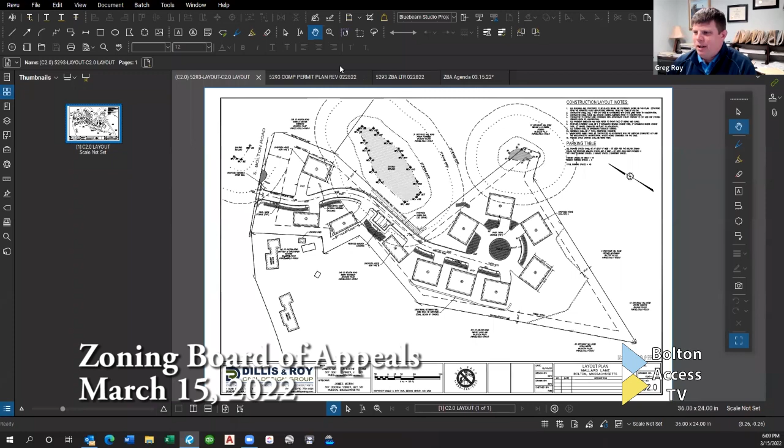After the last meeting, Jim and myself and our team regrouped a little bit, in light of the comments we had been receiving both at the last meeting and prior, and some of the issues that started to poke their head at us. Jim made the decision to reduce the density from 11 units down to 8 units.

That does a couple things for us, but I'll go over those in a second. Just an overview of where we're at with the plan: it's in a lot of ways very similar. We still have a cul-de-sac, a roadway coming up through the middle of the site, located in the same location as before. But you can see we've reduced the number of units.

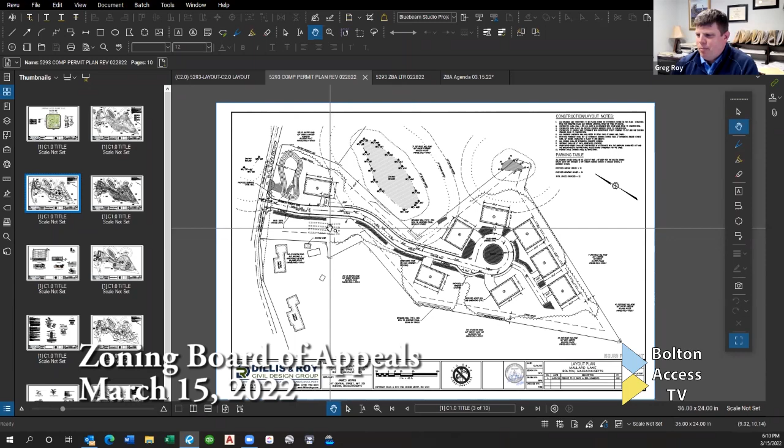The previous plan had units along this abutting property, and also one unit right in this location. This plan revision allowed us to move those units to the back of the site, which gets them further away from our closest abutter, which we see as a benefit.

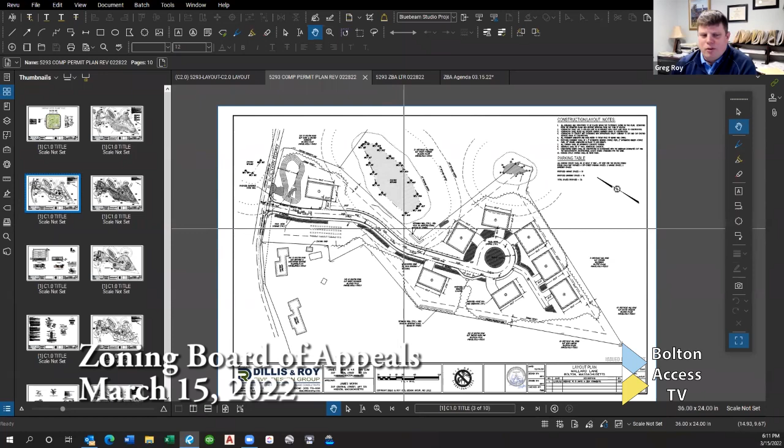It also allowed us to, because we now don't need to accommodate building footprint space particularly through the middle of the site, move the road further away from this wetland area. So it allowed us to be responsive to the concerns we were receiving relative to the wetlands impacts and buffer zone impacts that we had proposed.

It also allowed us to move the Unit 1 building completely outside of the buffer zone. So it just softened the blow a little bit relative to wetlands permitting impacts in particular, and reduces the magnitude of the waivers we need to request from your board relative to the town's local wetland protection bylaw.

Other things we did: one comment we heard last meeting was to take a look at the wastewater system for the site. If you recall, we were proposing the wastewater system in the back of the site, which is uphill, with septic tanks and pump chambers, and a pump chamber located down here that was going to pump back up to the leaching system.

One of the effects of relocating units to the back of the site is that it freed up some space in this location for the leaching field, so now we have a much simpler system, both to construct and to operate. All 7 of these units would be gravity fed to this leaching field.

This unit is still about one to two feet too low to get by gravity, so I still need to pump this building, but that won't pose any issues. We don't need any waivers of any kind to do that. But 7 of the units are now accessing the leaching field by gravity, which makes for a less complicated system, both to install and to operate in the future.

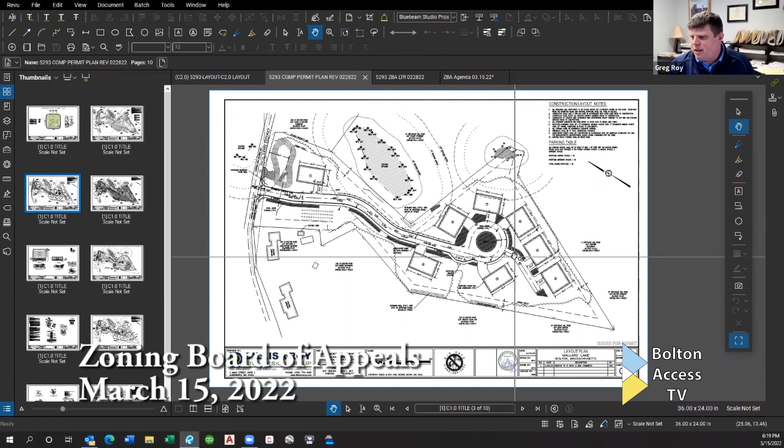One other thing I meant to mention earlier - you can kind of see, from a site layout standpoint, in order to get the units back here, we did introduce a shared driveway portion back here, which I think works out pretty nice. We explored moving the cul-de-sac a little bit to see if we could reshuffle things, but the location shown on the plan is really the best spot for it. So we have an offloaded configuration over here with these 2 units.

So we still have some grading behind those units, but the walls are quite a bit smaller than they were before. The wall went kind of all the way down that property line before. Over here, same thing - we have grading here, but the retaining wall really went most of the way along this wetland buffer edge. So we were able to really minimize that and reduce the size, both horizontally and vertically.

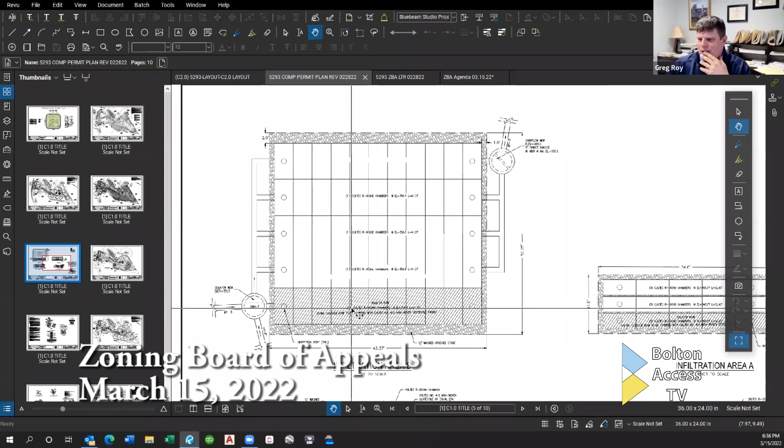So in cross section, if you were able to stand and look at the side, cut the system in half and look directly at it, this is what it would look like here. Are you all still seeing my screen? Yes. Thank you, okay. This is what it would look like.

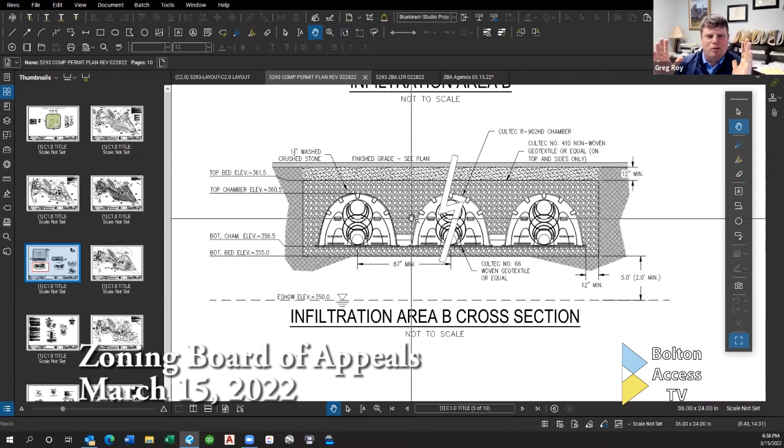They have these plastic chambers that are placed in rows next to each other in a crushed stone bed, and the entire crushed stone bed is wrapped with a filter fabric to keep the fine materials from sealing off the interface there for the exfiltration.

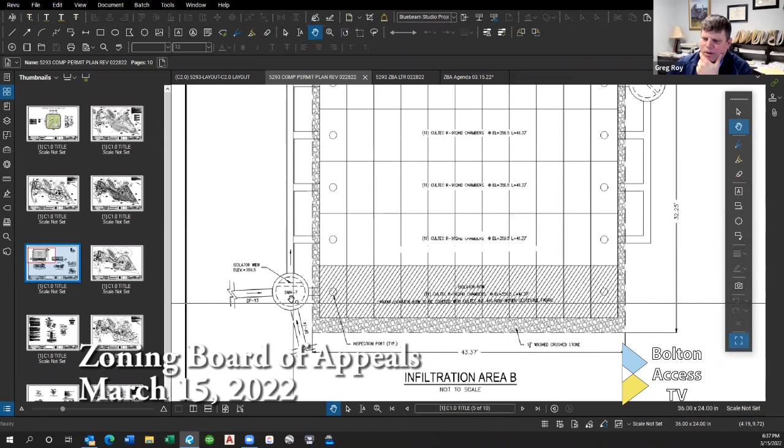So the way this works is the flow from the catch basins and the other inlets to the system flows into this entrance manhole. This manhole is a little bit exotic, I'll say—there's what's called a weir in here, kind of a dam that we build in that manhole that forces all of the initial flows, the first flush from the site, into this hatched row here, which is known as an isolator row.

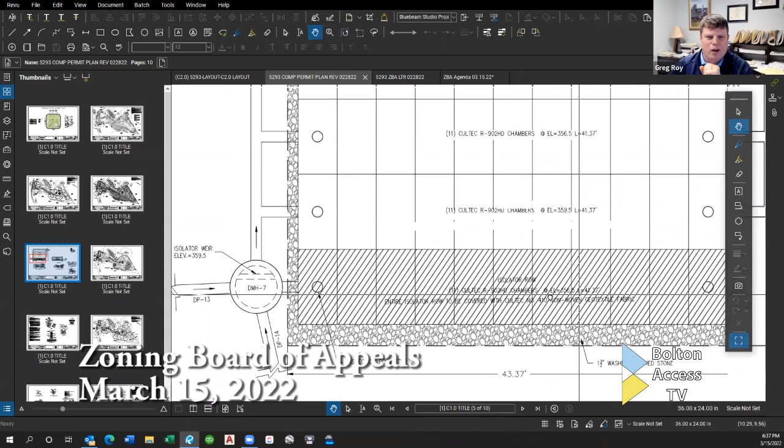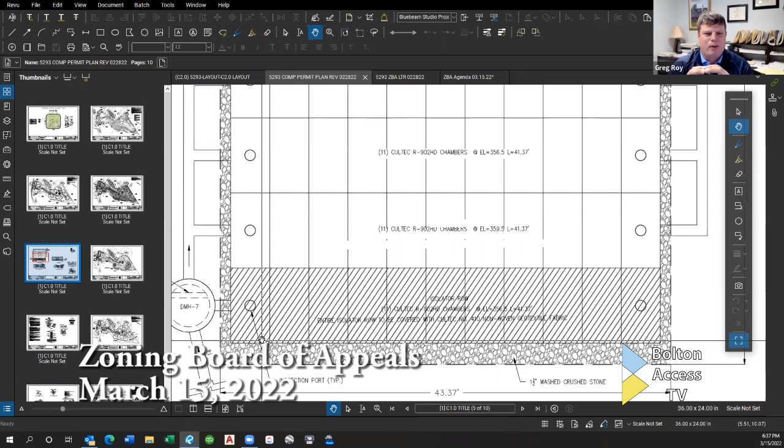That isolator row is isolated from the stone—we actually wrap the chamber with another layer of filter fabric. It receives that first flush, and the first flush of runoff in any storm event is where you're going to get the most sediment load and suspended solids entering the system. So what we're doing is capturing that, allowing it to settle in that isolator row.

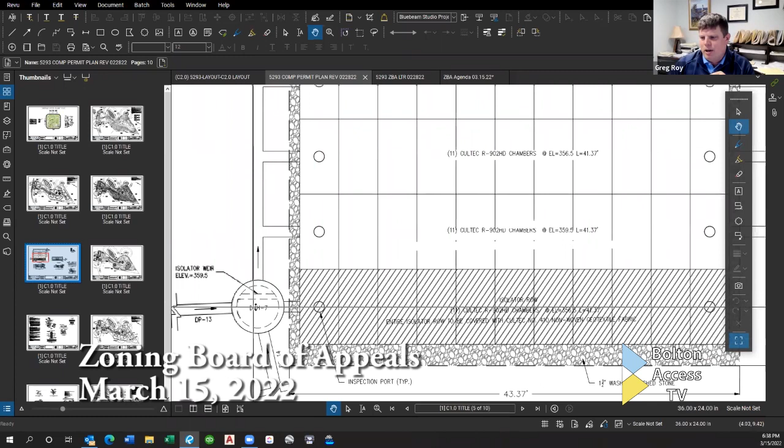And then as the storm continues and we get more flow, it fills up and flows over the dam in this manhole, fills up the rest of the structure, leaches down into the stone, and infiltrates into the soil below. That isolator row is accessible through this manhole, but also through these inspection ports, and can actually be jetted and vacuumed out.

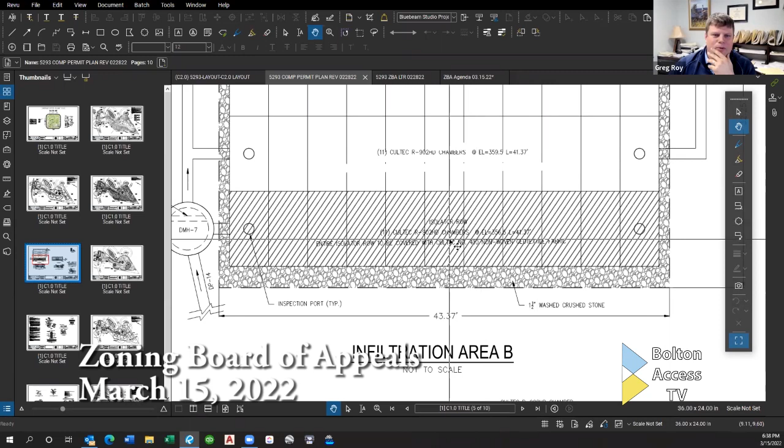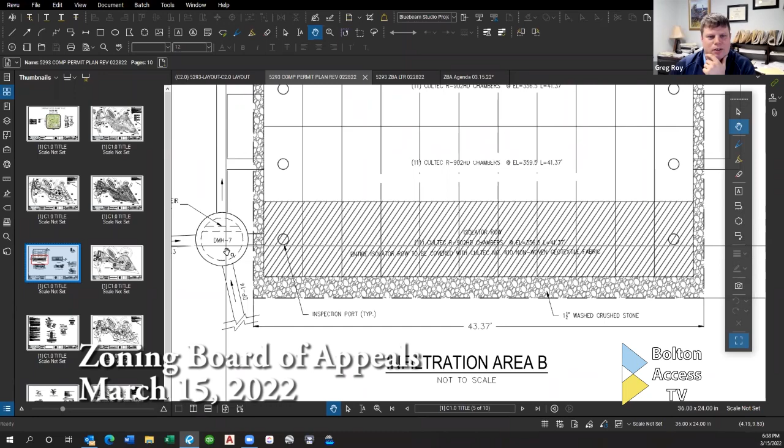That's part of the operation and maintenance of the system. You periodically need to inspect it routinely, like yearly, and when the sediment load gets to a certain point, that needs to be dealt with and jetted. You can put a jet in here, jet the row, and suck it out with a vacuum-style truck.

All of this is meant to protect and preserve the infiltrative capacity of the system. We're trapping the particles in the stormwater that, if left just to flow into the stone, would seal off that interface and over time diminish the capacity. So that's how that works.

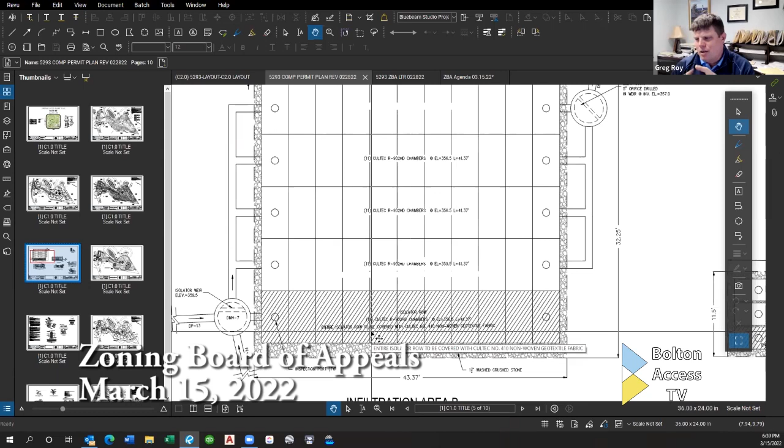Now on the outlet side, there's another weir, but it's really a dam, for lack of a better word, and this is what restricts the flow going out of the system. This dam is what keeps and forces the flow to pond and forces it to exfiltrate. There's a low flow—we drill a hole in that dam to let a small amount of water out, which restricts that release rate and lengthens the time by which it's released, to eliminate impacts downstream. High flows, anything over the 100-year storm event, will exit over the top of that dam for relief, and then bypass down to the outlet.

So all of that has been designed in accordance with the stormwater management policies to make sure that the post-developed runoff directed to that outlet, to that wetland, is less than or equal to, in our case less than, in all storms, to the runoff that's going there currently today.

So we did a comparison of the pre-developed watershed runoff patterns, and then we compared what it would be with this system. We did a comparative table in our drainage report that shows that with the implementation and construction of this system, all of those flows will actually be reduced.

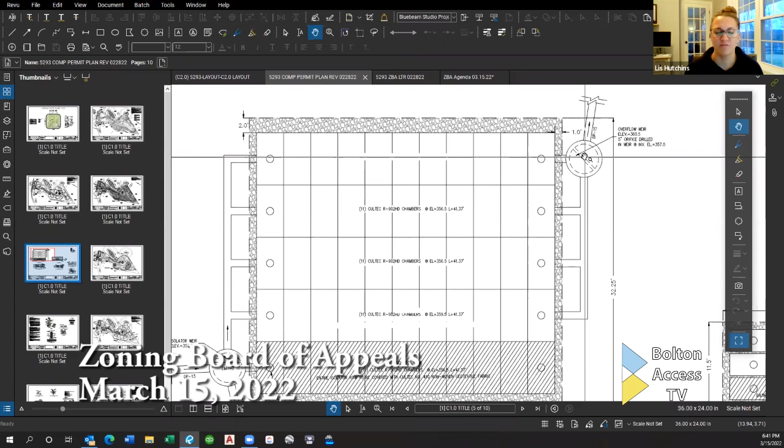After construction. And what is this basin capturing from? Yep, great question. We have two catch basins. I wish I could pull up another map, it'd be more clear. I have a watershed map, but it'd be too hard to get.

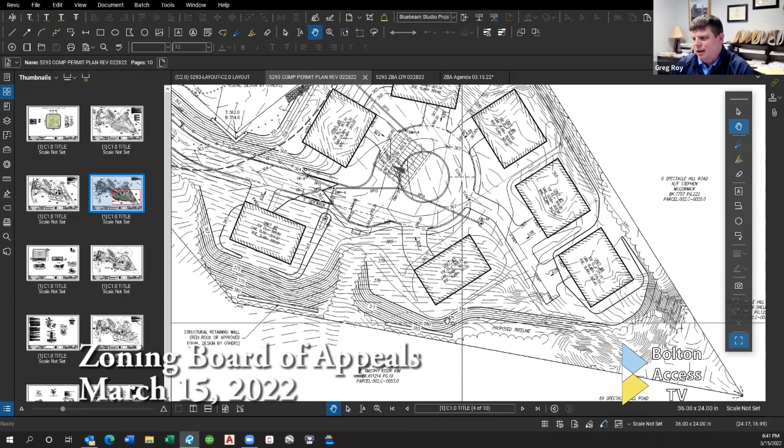So all the runoff from the cul-de-sac area flows down to these two catch basins and then actually goes back to this system. We also receive most of the roof runoff also flows into this system from the cul-de-sac area, and all of the area on the back here flows in. We've got some additional inlets that are going to pick up the overland flow and get that into the system as well.

So you can kind of see we have swales that come around here, another one that comes off of this shared driveway with another catch basin inlet here that also discharges the flow into that. So basically, with the exception of the back parts of some of these roofs, all of this roof, all of this roof, all of this roof all flow and get infiltrated into that infiltration basin.

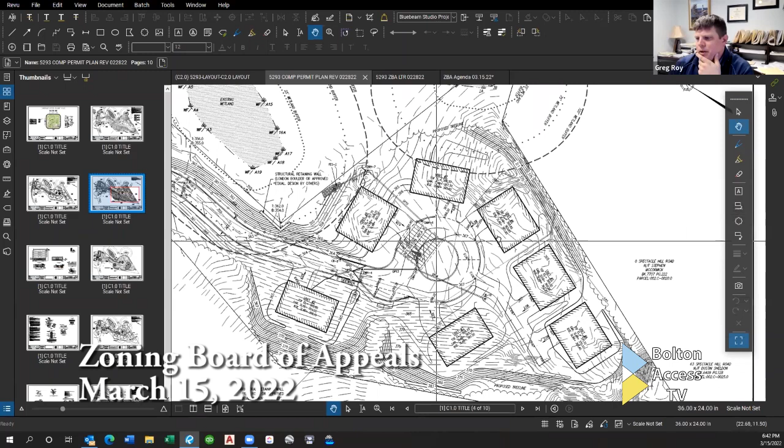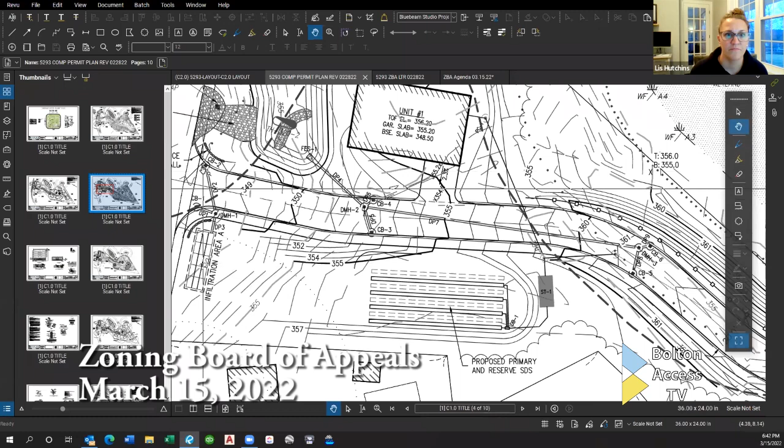And then the other one down here receives flows from these two catch basins down. So all the flows from the rest of the site go into this basin, with the exception of a very small amount of water downhill of these two basins. We put a very small infiltration system here just to catch and make sure we're not discharging water onto South Bolton Road pavement.

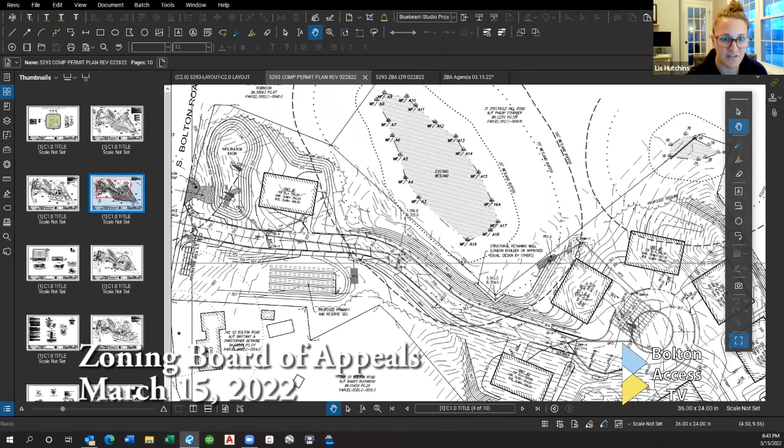Okay, so just to clarify, from that top, unit 2, basically where those other two catch basins are, between that and unit 1, that's actually going into the infiltration basin, not into infiltration area A. So infiltration area A is going to specifically, there's 2 catch basins there that will catch what would roll into the road. Yeah, it's basically just a little bit more, but basically just the road from this point down.

Okay, and then that infiltration basin there, what is the proposed function of that? Like, how is that basin supposed to work? That's going to be an open basin, so it'll look like an excavated pond, but it'll be dry. We intend it to be a dry basin.

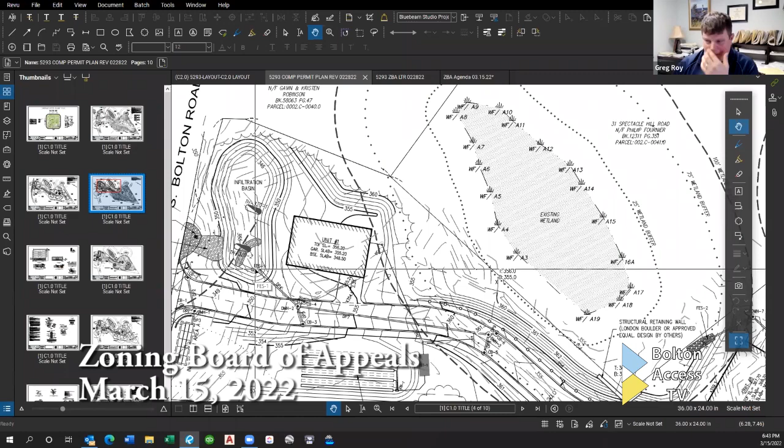It'll function similar to the isolator row I just explained. We'll have more of a conventional forebay, so we'll dam up a small portion just as we enter into the pond, and that is intended to hold up that water, take that first flush again, and settle out the sediment and suspended solids that we have.

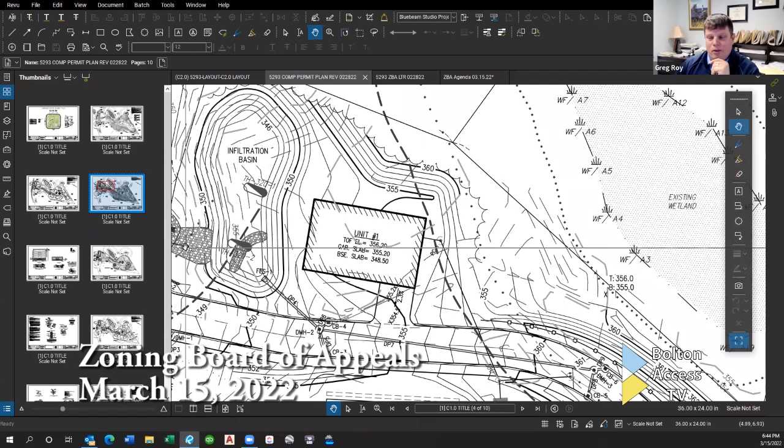As the storm continues, the water level would build up in the pond. But we've designed this one to completely infiltrate up to and including the 100-year storm event. So the soils here are very good and sandy, the groundwater table is very low, so we do not have an outlet release out of this basin up to and including the 100-year storm event.

But if we had an act of God, which we've had pretty much every summer for the last 3 to 4 years, at least one, if not 2 or 3, we have an emergency overflow weir here where it would spill down and enter into this catch basin where it discharges across the street. But that would only be an emergency, greater than 7-inch rain, tropical storm event basically is what we're looking at.

And just to be clear, we're comfortable with the overflow from that infiltration basin going into that catch basin based on its current functionality. The reason I'm asking is because I do drive by this area on periodic occasion, and I know it has helped somewhat the flooding seen on South Bolton Road. But in my opinion, I still don't think it's the best design ever, and there still tends to be a little bit of runoff there.

So I am a little bit nervous about that, and again, I know it's like an act of God situation. So if we're having a tropical storm, nobody should even be on the roads to begin with. So that's an issue.

But that being said, I just want to make sure we're comfortable with that type of flow. I suppose the DPW director will want to weigh in on that. But in pretty much most projects I work on, it's deemed acceptable if I can show through drainage calculations that I'm not discharging anything up to the 100-year storm event. In some towns it's less, sometimes they look at the 25-year or 50-year threshold, but in this case the 100-year is pretty much the largest storm we'd be reviewing. And again, I have zero discharge out of that, so I don't anticipate any issues.

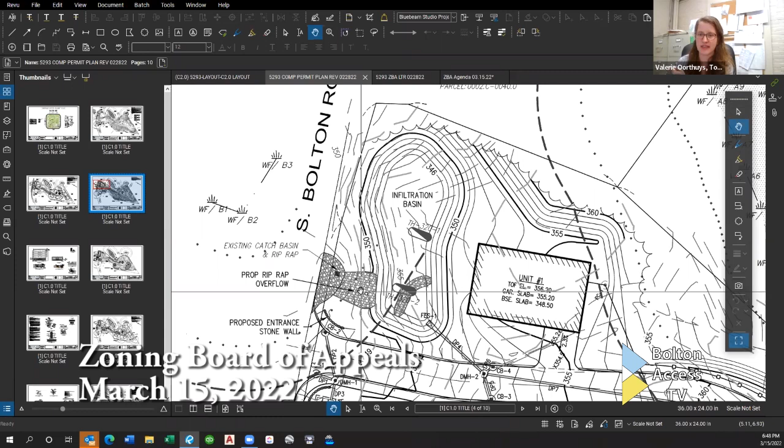Sure, all right. So one topic I still have concerns over is the wetlands in the area. There's still a portion of the roadway and a portion of Unit 7 within that 100-foot buffer. Since the 2019 wetland delineation, I believe there was a vernal pool that has been certified, and the Conservation Commission did not review or confirm the delineation of the wetlands by Unit 7, so that other pocket could have greater impacts on the site than is currently shown. An ANRAD or an NOI has not yet been filed with the Conservation Commission, and that's not a requirement of this permit. But since October we've been hearing from the applicant that this would happen during the ZBA's process, so I wanted to know if that's still intended to happen within the public hearing process or after, because that's really how the zoning board is going to get comment from the Conservation Commission. Otherwise we'll just need to insert conditions to cover our bases.

Yeah, I'll speak on that, that was my intent. But as we move forward and reduce the amount of units and pull everything out, for me to go to conservation I've got to know that these units are in the right spot. So I'm probably going to say at this point that I really need a decision from the ZBA so I can move forward with the locations.

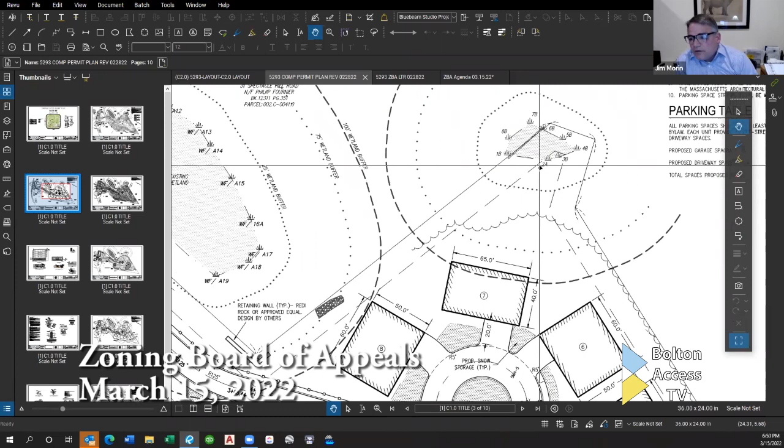So that's what I— go ahead. Yeah, if I could talk to that a little bit. So filing an ANRAD is one thing, and that hasn't been done yet, to your point, but that's certainly something that could be done. It's a little bit challenging in this case because the wetlands, with the exception of the one you were just referring to, Valerie, in the back of Unit 7, the other one's off site, so it's a little hard to do. We just kind of ran into this issue in Groton — the Conservation Commission can't go on another adjacent property and certify a wetland line without permission from the property owner. So it's a little bit tricky here, and that's sort of the issue with the ANRAD.

The notice of intent, and I talked to this with Jim as I was getting involved here a few months back.

The notice of intent filing really in a 40B project needs to follow the comprehensive permit. The reason why is the authority to grant waivers from local wetland bylaws lies with this board. So it's putting the cart before the horse to go to the Conservation Commission and ask for an order of conditions when we don't even know what waivers we're going to receive. We need to have the zoning resolved with the waivers so we can file the correct filing with the Conservation Commission pursuant to the Wetlands Protection Act.

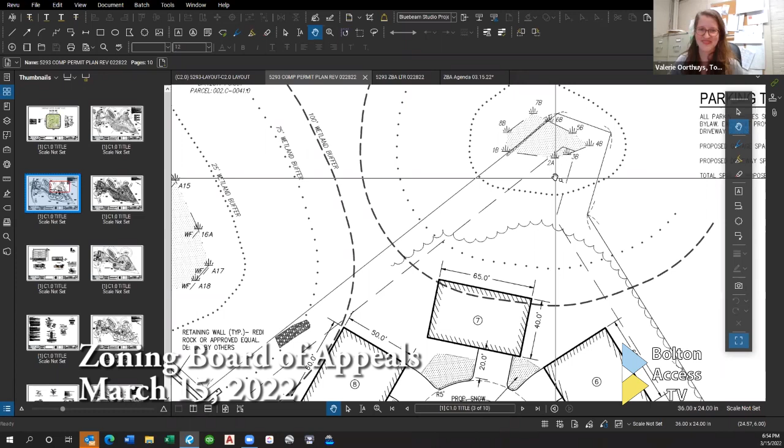We did measure the sight distances, and those are on the revised set of plans. Okay, I just didn't see them. Thanks. Yeah, they're on there, I can't remember which sheet. We put them on one of the sheets. Great, I can't remember what sheet, take me forever, but we did put that on there. Okay, I can take a quick look through.

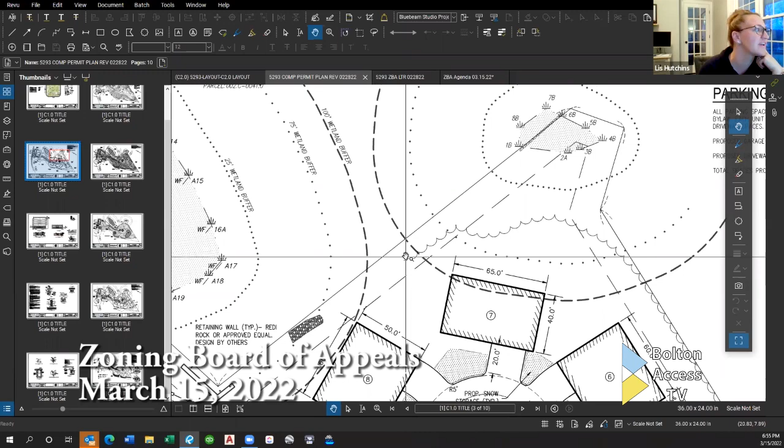Valerie, I'm actually seeing them on the layout plan. Great. But aside from that, I do actually have a question to bounce off that. Do you have any lighting? Are you going to be doing any lighting, I guess, for this project, like public lighting? No. Okay, the landscape plan didn't have any on it.

Okay, the abutters have brought that up as a serious concern, no lighting. Totally understand, I'm just thinking, I'm not going to go there. Sometimes we get in a pinch on some projects where public safety wants lighting and the neighbors fight about it, and the neighbors live there. So this is scheduled, understood, with no lighting. Yep.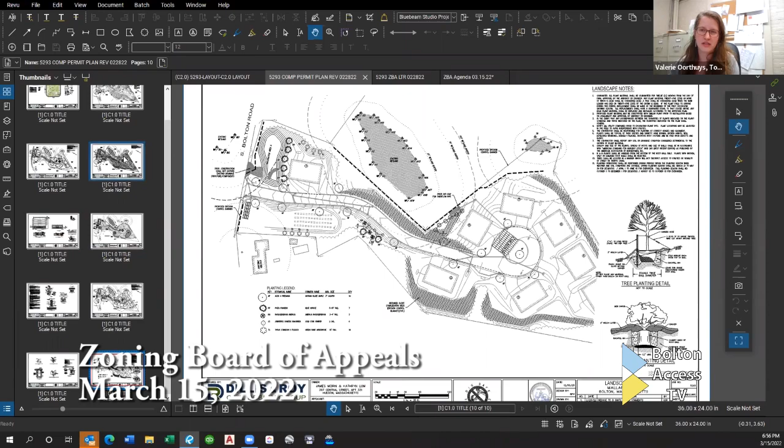On sheet C3, the grading and drainage plan, I just had a little nitpick. Is the proposed tree line intended to be the limit of clearing? C3? Yeah, C3. Where are you looking? I saw it closer to unit 7. Oh, this is proposed. The existing tree line isn't on there, but this is the proposed limit of clearing. Okay, yeah.

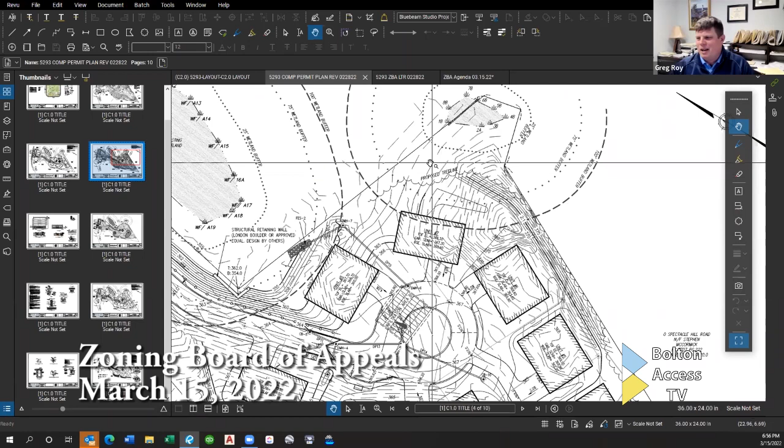Sorry about it. Yeah, proposed tree line probably wasn't the greatest way to label that, but that is the proposed limit of clearing. We blended that in spots with the existing limit of clearing. I don't have a great example of that because it doesn't show well on this plan, but yes, that's the limit of clearing. So it does strike me that there is a lot of clearing on the site, of course. I'm wondering if you've considered phasing of clearing at all.

There's been no phasing of the clearing? During construction, Valerie, or? Yep, exactly. Yeah, sometimes - I know there's a majority of slope on the site as well, so just thinking about erosion control during construction.

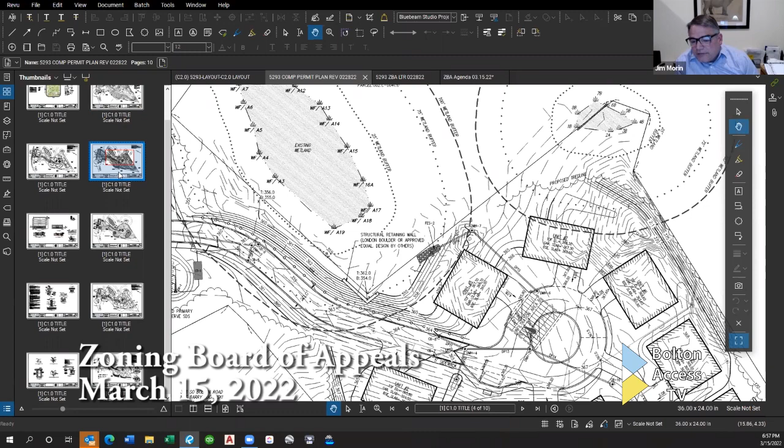Again, the majority of the site is open around this cul-de-sac, and it's been open - previously it was a gravel pit. It was mined to build 495. So we have very good drainage, I would say.

During construction, we're going to need to open it up because a lot of the materials are not going to be trucked in - they're going to be built from the site. So we'll have to open it up to build the cul-de-sac. I would talk to Greg about putting construction bays around the property in the proper locations to control the stormwater, like building some temporary construction ponds on the site. That's how I would plan on handling that concern.

Yeah, if I could add to that - on larger sites, phasing is often involved. This is a pretty small site. There's really not much room, and actually a lot of where the 7 houses in the cul-de-sac are going to be built, you're really going to need to open that up in order to build it. And of course, to build that, you've got to open up the front of the site to do it. So it's just not a site that lends itself well to phasing.

You pretty much have to build all of the infrastructure on the property before you can build a unit, right? So it's not one of those sites where you have a lot of road and you could look at maybe building a section of it in the drainage that relates to that section, and then work towards the back of the site. It's really one of those sites that's going to need to be built pretty much all at once.

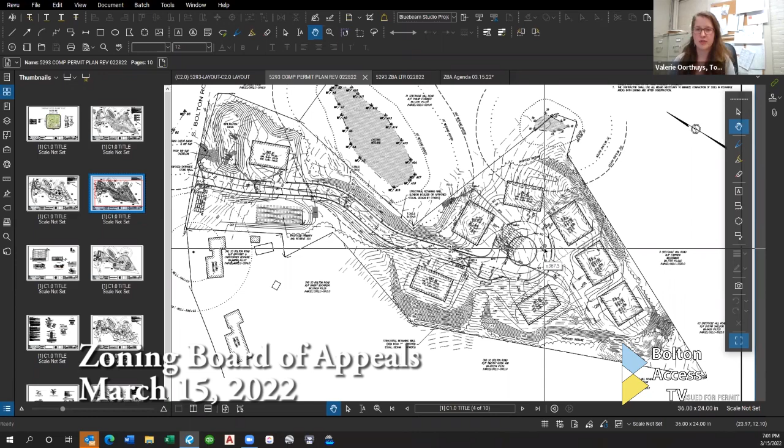Does the existing conditions plan, in your opinion, show all of the 18-inch diameter trees, rock outcrops, stone walls, and structures - particularly along South Bolton Road? I think the ZBA's application details for comprehensive permits do ask for those types of features to be noted on the plans. I know there are a lot of large trees around the road itself, and I assume those do need to be removed for the grading and placement of infiltration system A.

Yeah, we actually did send a survey crew out to do that. It happened, I think, on the 1st of March, and it didn't make it into this plan set - but we did do some supplemental work out there to pick up the trees along the frontage of the site, because there are some trees there in that location. Generally, we'll make sure that we respond to that, Valerie, either by updating the plan or by giving the board a narrative confirming that all of those details will be responsive to that requirement for the existing conditions.

I asked that in part too, knowing that South Bolton Road is a scenic road. So I don't know if you've had those discussions, or had the tree warden out perhaps to take a look at things, just to make sure there aren't any issues.

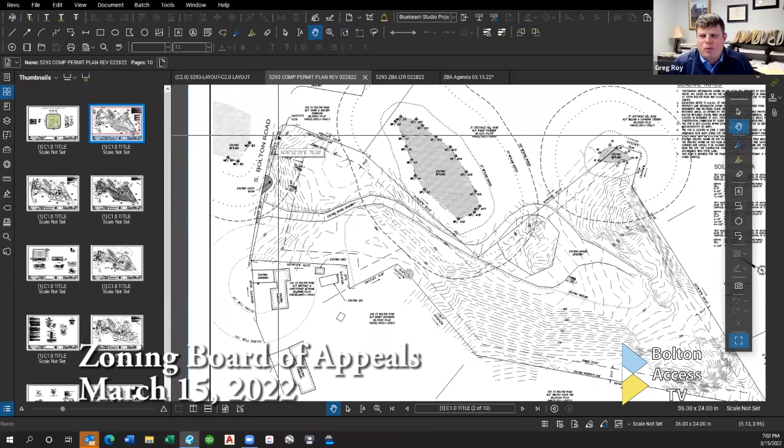I think the tree warden looks for trees that are 1.5 or 2 inches or greater diameter, even looking at smaller ones within the town's right of way. I'm not sure if we even have any that are in the right of way, there's not a lot of right of way there with the pavement, so there may be one or two, but I don't know that we need to take them down. We'll be responsive to that.

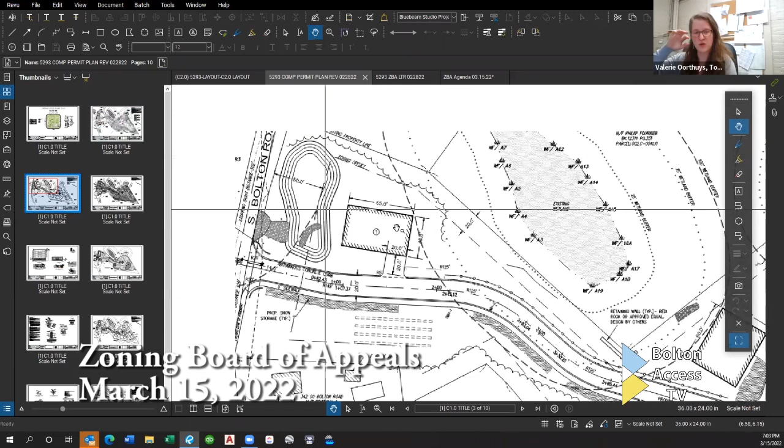I wanted to add my own comment on having unit A, or unit 1, kind of toward the road. I have concern about potentially having one of the affordable units far from the other homes. It's easy to get an us-and-them feeling in a neighborhood, and I've seen that in other developments. It may not be a statutory requirement, but as Joe mentioned earlier, it may be a defendable condition to insist that those two affordable units are with the others around the cul-de-sac. Did you have any consideration given to having all 8 units around a cul-de-sac?

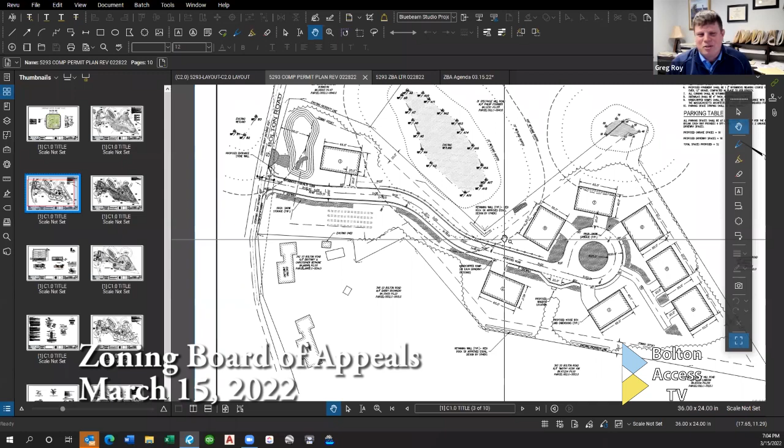Yeah, I tried, I would have loved to have them back there, I just can't, there's not enough real estate. I was really hoping when I first set out to do this, after Jim gave us the green light to update the plan, that I was going to be able to do that, Valerie. It would have simplified things quite a bit, but I just couldn't make it happen. The only thing I could do is stick something right in here, but then you're feeling like you're pounding 10 gallons into a 5-gallon bucket again, even more so. There's big slopes here, and we were trying to take the pressure off some of the excavation on the site. So it just seems to make sense to have one down there.

I have a quick comment. Why don't we just make a decision now that all the affordables will be on the cul-de-sac, and that'll solve the problem? It won't be isolated, and at this point it takes it out of any kind of controversial position. You've got 8 units, or 7 units, up there. Why not? It makes sense, it would make it easier. And there are 2 different unit styles there, so one of each up in that area. It could be indistinguishable and it's taken care of. That certainly would be easy, it would make our job easier, less scrutiny.

Joe, what's your thoughts on that? Would that be fine if we agree to that now? I think he had to leave at 7. He made some comments earlier, I couldn't hear him fully, but I don't know if we should do that at this point. I wish he was still around.

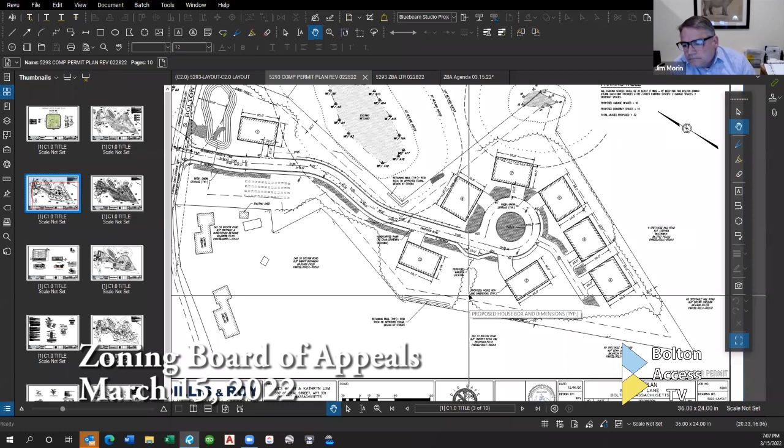Yeah, and as long as they're one of each unit, is that a concern? And if he says no, then that's great. Okay, all right, that would be great for me. Yeah, I think for a lot of people.

I'll just quickly add, my last comment is just that I didn't see any waivers from the planning board for subdivision rules and regs.

So I don't know, we aren't able to really grant blanket waivers, but I was wondering, if this plan came before the planning board, one question we would be asking is whether there'd be a sidewalk constructed along the frontage. I know there's a sidewalk within the subdivision itself, but along South Bolton Road as well they'd be looking for that. And as well as, I didn't actually get out my scale, but the proximity of the home at 342 South Bolton Road may be within 100 feet of the Mallard Lane center line.

So that might be a waiver as well. Mallard, oh, well, I mean, it's not a subdivision. So why would we need waivers to the subdivision regs? Yeah, it is, it's something that we have asked of other comp permits. Okay.

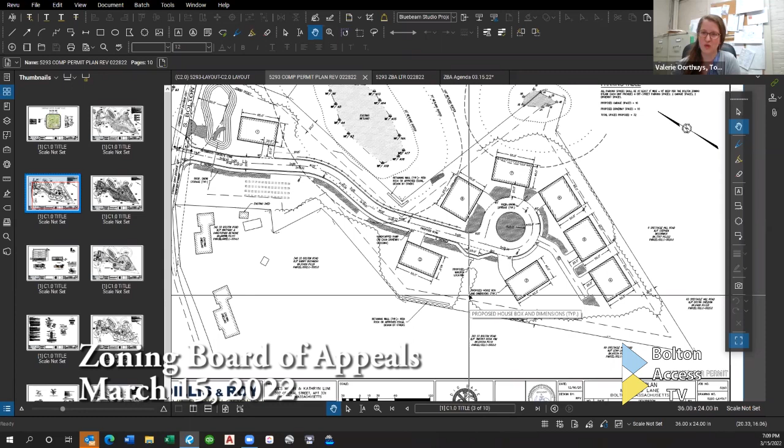All right, well, we'll review that. I mean, that's why we didn't do it. Yeah, because we didn't have - I mean, we're treating this like a common, basically like a common driveway. So I think you'll see we have some waivers relative to that section, and we designed it in the spirit of your subdivision road regulations, but technically speaking, I'm not sure that - but we'll review it, point noted. Right, if you want to take a look at the common driveway rules, that could be a different issue.

But I believe the ZBA members should feel free to correct me if they feel like I'm wrong here, but I do believe it's listed in the ZBA's rules and regs. Okay, if that's the case, then we'll review it.

All right, one other specific to note based on that, too, from Valerie's comment - I think they recently changed the subdivision rules and regs to require granite curbs. Is that correct, Valerie? Or so, I think the curbing - I know you have bituminous concrete here, but I would highly recommend looking at granite curbing, because the bituminous is rough and everywhere we have it in town it gets destroyed so easily. I know there's a cost associated with upgrading to granite, obviously.

But I think that is now part of the subdivision rules and regulations, and it would be something I'd suggest looking into, because as a point of Bolton history, the last director of public works, Mr. Brown, vehemently made arguments at the planning board not to have granite curbing. He wanted Cape Cod berms because granite curbing tore up his snow plows, and he was sick and tired of replacing snow plows that crashed into the granite curbing. So there may be a range war - that's all I'm saying. It's good to know, good to remember those discussions over the years.

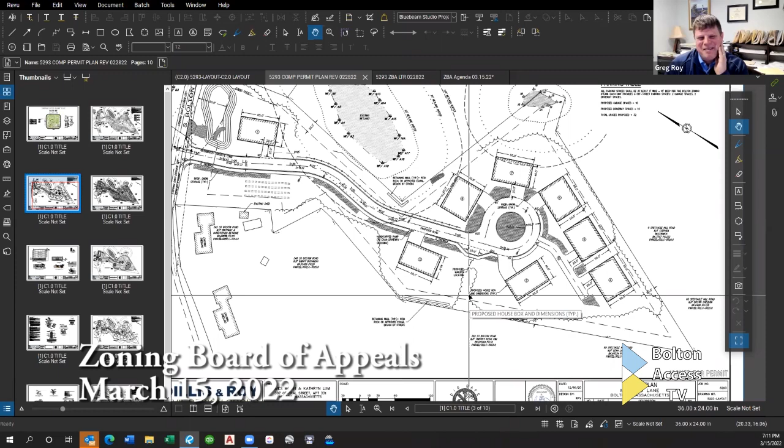Yeah, all right, well we'll look at it. We'll look at the - I'm not prepared to go through that whole subdivision rules and regs analysis tonight, but we'll commit to taking a look at that and report it back. Perfect.

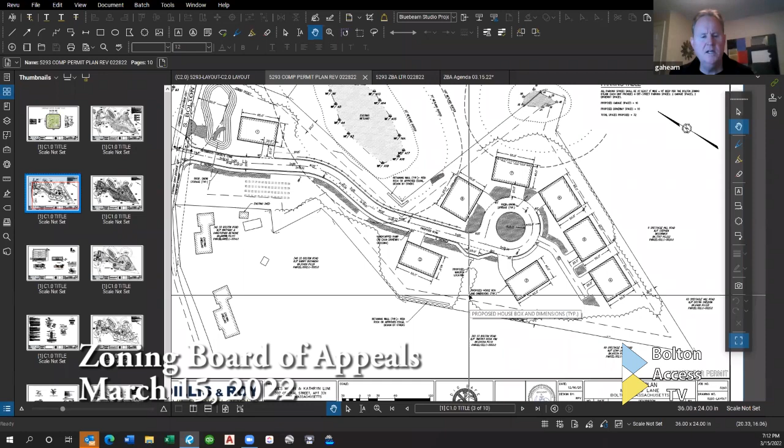Any other questions from the board, Valerie? And if not, do any of the abutters online have any questions? Yeah, I think there is a hand up, Gerard. Oh yeah, and now you see that, Andy, thanks - I was looking at the plan so much I had, yeah. So Valerie, you want to open that question up to, it looks like Barry?

Yeah, he's able. Okay, good evening everybody, my name is Barry Bushinsky. I'm a direct abutter, I live at 348 South Bolton Road. A few comments: I fully support no site lighting, I fully support no granite curbing, Cape Cod berms are fine. I have a question though relative to the infiltration basin at the front of the site.

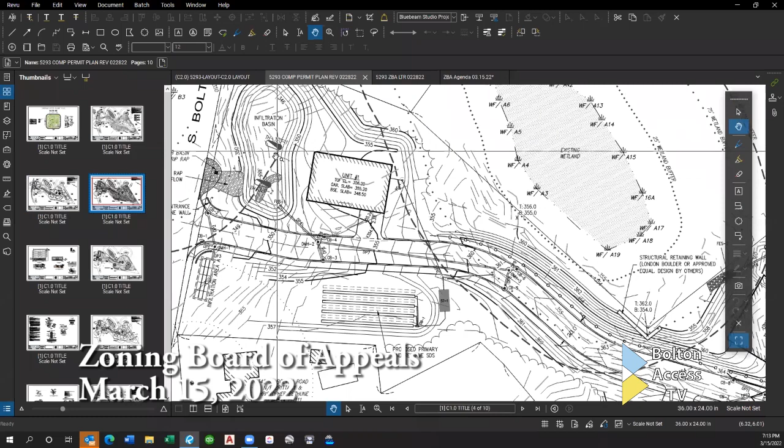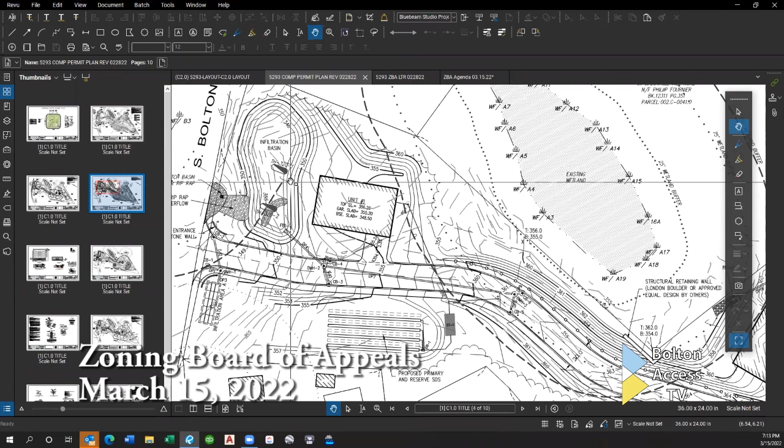It appears that there are two test pits that were done, test pits 1 and 2. And so Greg, I hope that the design of the infiltration basin is designed based on the soil type so that it minimizes any standing water, even on a small storm event. Because I don't support a chain link fence around the infiltration basin, and I'm hoping that you're not proposing a chain link fence around the basin.

Yeah, thank you very much for that comment, that's a great comment. We did size and design that based on soil types. The basin's working depth is really only 3 to 4 feet, so we are not proposing a fence on that.

And your point about dewatering and making sure that basin stays dry is valid. It's not shown on this plan, but I typically put a low flow wick drain at the bottom of these, so that particularly when we have a frost condition and an early spring or late winter rain event, we still preserve the infiltrative capacity of the soils. We could certainly add that to the plan, but the intent is for this basin to dewater within 72 hours per stormwater management guidelines. Based on the soils that are there, I believe it will dewater quite a bit faster than that. But that's a great question.

Okay, thank you very much. The other point is that I used to be on the planning board a long time ago, and I don't support any sidewalks on South Bolton Road. I think your design of having internal sidewalks within the development, but nothing along South Bolton Road, is right on. It's a scenic road, and sidewalks would destroy that. My wife and I and all the neighbors walk up and down, even though it's a 40-mile-per-hour street. There's a lot of activity on bikes and walking, and we have no problem walking on the road, not needing sidewalks. So I just offer that.

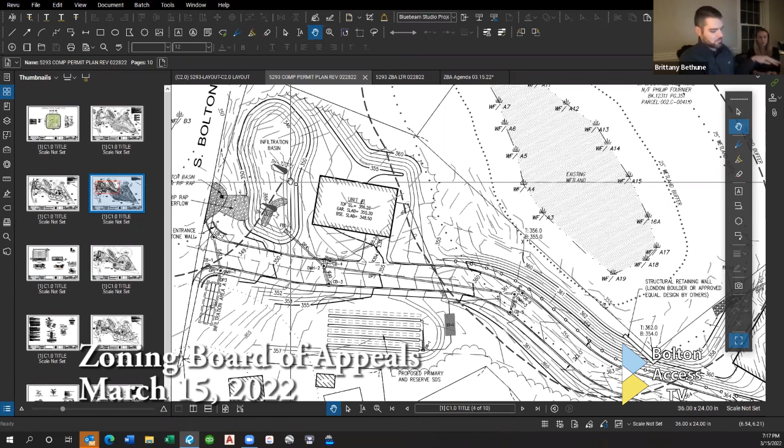One question I do have, and it's honestly not even for our own sake, is, I know it hasn't been put on the plan yet, but it's the pump for home one. Where will that be and who's responsible for that? I know that it's been discussed, but the same concerns, because it will be right near the water in the well for unit one. So that's one more comment.

Another question we have is, obviously there's now two different sizes of homes that have been laid out here, four and four. We were just wondering if architectural plans have been made to represent these exact sized houses now for this plan, and where are those located? And then, do you have anything else? I don't think so, at the moment. All right, we'll leave it at that for now.

And, sorry, before we go, I also concur with Barry's sidewalk comments and the lighting, and I'm just reaffirming everything that he said as well, and the not having the fence on the basin and all that. I second all the comments as they're.

As long as those proposed walls at the entryway obviously are not too high, because our peak of our driveway is probably the worst of the road in terms of sight line, adding any kind of wall there probably might not be a good idea, just because it's pretty dangerous pulling out of our driveway as it is, and will be very dangerous to residents if there's any kind of obstruction. And obviously with the intention of six of the eight being 55 plus, I want to make sure it's safe for the people that live here as well.

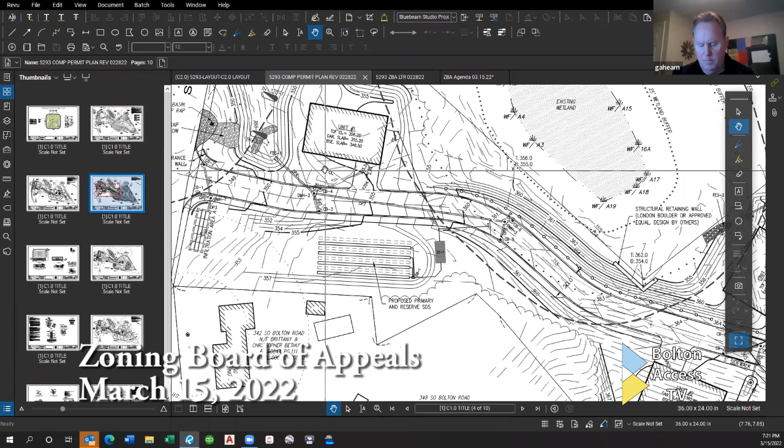You think when we'll get something back from Horsley Witten? Yeah, I think they were saying it's possible by early next week. However, I have a planning board meeting Wednesday and a master plan meeting Thursday, so I don't know about Tuesday. I have no availability this week. We're gonna need time, I mean, I'd like to think we'll get a nice clean letter with no comments, but I have to believe we'll have to clean a couple things up. So I'd imagine we'll need a week or two to do that.

So are we looking at maybe early April? Sounds like that. That first week for me, the 4th through the 7th, is wide open. Okay, and the 4th, let's see, what are those days? Monday the 4th through Thursday the 7th. Okay, Monday through Thursday. Tuesdays, as a pretty hard fast rule for me, are pretty much not available anytime moving forward because we have lacrosse now.

It would be possible if we did it later in the evening, but at 6 o'clock I couldn't make that. Okay, how about that Wednesday? Wednesday is fine for me. And that would be the 6th. How's that work for Andy, Brad? At the moment it's free. I haven't looked at my calendar, but I'm guessing that will work.